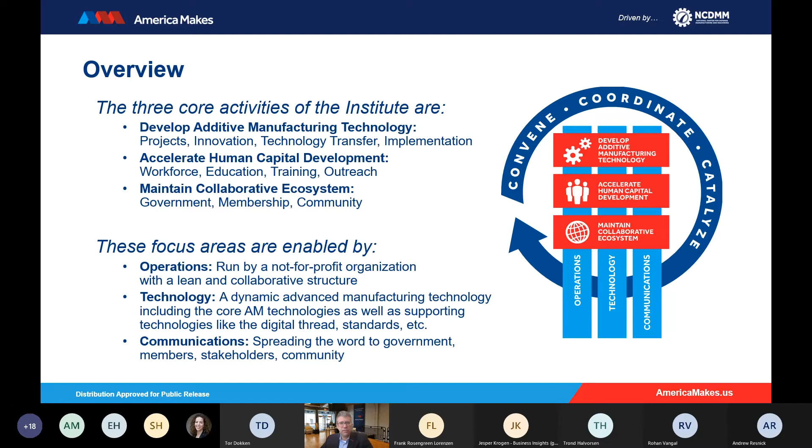But what we saw almost a year ago to the day was, I'm on the East Coast of the United States, and we were delayed a few weeks from what you were seeing in Europe, and right in the beginning of March, we started to see everything become crippled because of not having available supplies, and really we saw the supply chain become immediately crippled.

I remember this like it was yesterday, but we started out having conversations as folks trying to convene and coordinate a technology. We're really focused on making sure we're bringing information to the community and sharing information. And in a time when we weren't sure what was going to happen, most of our conversations were about where can we help support these folks who we know are going to be working remotely, and we knew our worlds were going to change, but we didn't know what that really meant at the time.

That very rapidly transitioned into medical professionals and the system not having the products that they needed, and we saw the additive manufacturing community want to get involved and start asking questions. And as a membership driven organization, we have a couple hundred members that range from very small organizations to very large organizations. We saw everyone from makers to manufacturers getting engaged or trying to get engaged and asking questions.

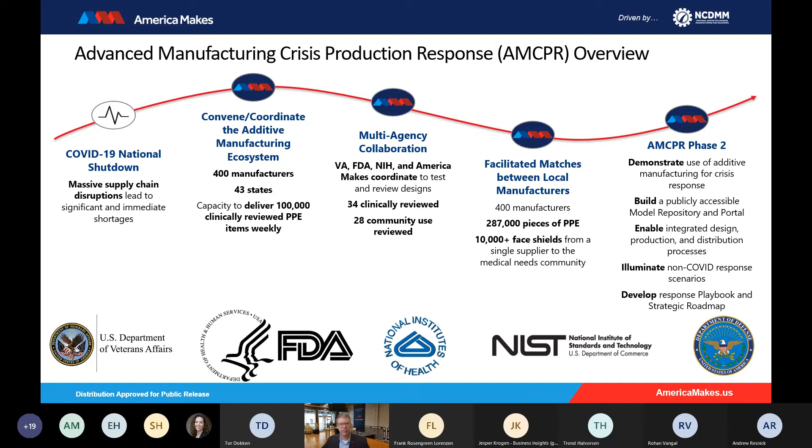What I'm going to talk to you about for the balance of my time is some of the work that we're working on today to try to assure that we are better prepared for the future. So how do we build something that is publicly accessible? One thing that has proven to be very needed early on and through the early phases of the response was people were looking for trusted information. Having our federal agencies come together and using us as a public-private partnership, we were able to reach across industry and academia and even into the small maker community to get the right information to them, because nobody knew what to do. Most folks were not from the medical manufacturing community.

So, this is a graph to demonstrate what we saw happening in the early months. There was a rapid response. We worked really hard on bringing people together, much like we saw all over the globe. Many people wanted to help, but we needed to make sure we were working on the right thing. What we're focused on moving forward is really about scaling capability and then exercising that capability. From the earliest months, we've been challenging what it is that we as a country and really as a globe need to have in place so that people can get access to the information that they need when they need it in a distributed manner.

One thing I think we're all very proud of is how additive manufacturing has really demonstrated the distributed manufacturing model. We've talked about it for years, that additive is an enabler to that working. We have seen it happen time and time again over the past year, where it has stepped up, and that's ranged from early on face shields and different adapters to components for other medical devices to a variety of other different implementations.

We're now challenging the community at large, I would say, and our own governments, of what do we need to have in place so that we're better prepared for the future. The only thing we are certain of is there will be more crises. Whatever they might be, there will be more. And we need to make sure that we have systems in place so that we're able to respond much more effectively than we were able to in this most recent and current pandemic.

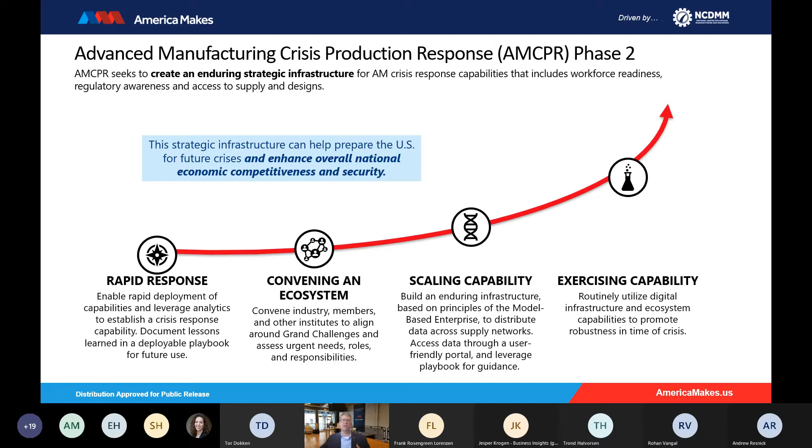So what that's led to for us is the development of this program called AMCPR, or the Advanced Manufacturing Crisis Production Response. What it is really about is how do we bring together the community, the ecosystem, those that are able to be involved and make a difference and support either the manufacturing community, the needs community, or the design community. And then how do we make sure we have that information available? Distributed manufacturing only works if people can get access to the information that they need.

So that's led to really a two-pronged approach to what we're doing. One is engaging with the ecosystem and really trying to build out that supply chain. And on the other side is ensuring that we have a system or a tool in place that is able to actually support this in time of need moving forward. The way we've done that and the exchange that we've built, and I won't get too far into this, but there's a variety of different ways that you can engage.

At any point in time, we need different types of organizations, different types of people to be involved to help support a response, whether that's a natural disaster, a health emergency or pandemic, or there is just an issue with the supply chain. Those happen repeatedly. Some of what we're seeing happen within the chip space today, no matter where you live or where you're dialing in from right now, every country has realized dependency on others, although it is absolutely needed, and a lot more macroeconomics come into play there. At a fundamental level, we all want to be able to take care of ourselves. So we need to understand what we need to have in place in order to do that.

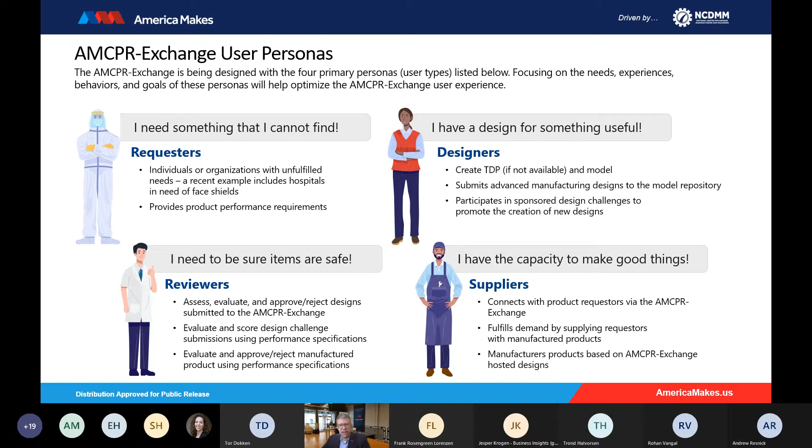Another major area where we saw an opportunity was around education, and really it was more framed as workforce development. So I had multiple organizations call me and want to know how to get their workforces re-skilled so that they saw additive as a potential solution or as a potential bridge or opportunity to pivot because their current model wasn't needed. Something happened, whatever supply chain they might be a part of, where they saw significantly diminished demand. That left them wondering, what do I do with my people? And then at the same time, they saw this opportunity where additive was able to make components that were in critical need, but they didn't know how to get their folks trained.

That ultimately led to a program. We're currently still working this. It's really a continuum or a pathway where folks can get engaged and get re-skilled and upskilled in additive manufacturing and associated technologies. And through that, we've built out a series of different opportunities to get engaged, from just simple awareness to make sure people understood what the technology is, why they should be involved with it, then moving across the continuum where we started to create micro learning badges and then micro credentials that all ultimately rolled up into industry recognized credentials, so that we were able to get information out to the community so that they were able to really leverage and get involved in the response.

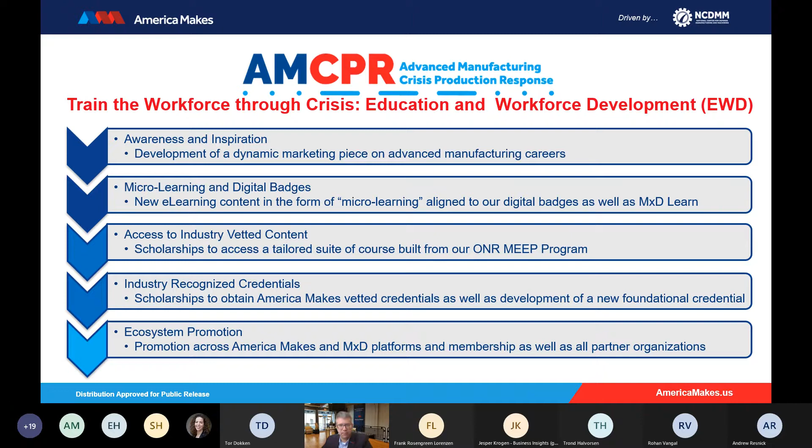And this is an ongoing opportunity. So nothing that we've done, whether in the States or across the globe, is going to go away. Although hopefully, as we make improvements and see the current pandemic diminish over the coming months, we still need a resilient supply chain. We know there are going to be opportunities and needs and issues with supply chain. So what do we do? How do we make sure that we're in a good position, whether it's in the States, Denmark, or anywhere else?

Through this AMCPR program that we're working today, we've created a series of scenarios. So we showed on the diagram where there was a curve, the need to scale and then the need really to test. So what we're doing right now is testing the system. We've created a series of different scenarios. We're testing everything from natural disasters. So if there was an earthquake and we saw the inability to get clean water where it was needed, how does the additive manufacturing community have the potential to make a difference there?

As you can imagine, we're doing some scenarios focused on the current healthcare crisis that we're in. We have some that are focused on national security, where if there is a problem with a system that is down and needed, how do we get the right group of manufacturers involved in that? And that is a pretty comprehensive system where we're looking at everything from different types of complexity, from process to product, regulatory considerations.

Who are the folks within the manufacturing community that can respond? Do they even know there's an opportunity to respond there? Are they connected? So if you think of a natural disaster, if we don't have the ability to get them information, can we operate in low bandwidth environments, and can we get information offline to them so that they're able to respond? So we're going through the process right now of evaluating all of this.

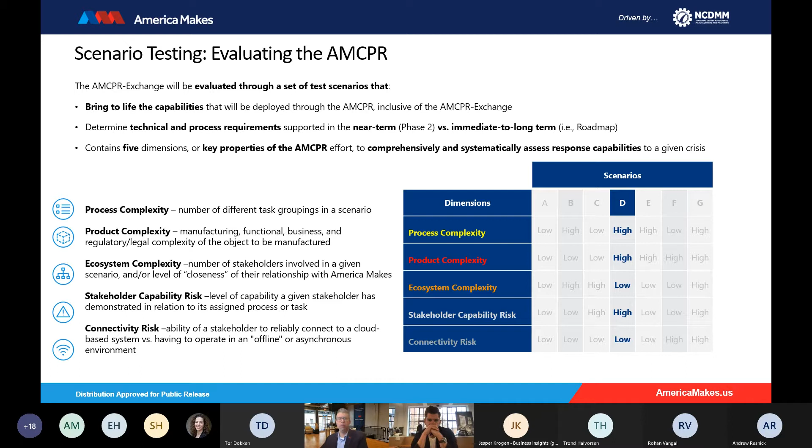So we're developing right now a roadmap for both the system as well as this concept. And the final product that will come out this summer is going to be an impact report, which will, one, capture what was done, why it mattered, and then also at the same time look forward to say, this is what we need to be thinking about next.

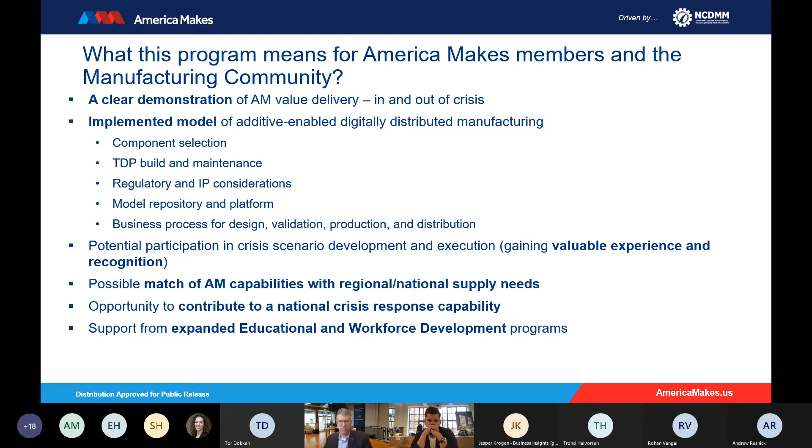So, ultimately what it means to all of us is we know there'll be crises. We know we need resilient supply chains in both times of normalcy and times of crises. We can learn a lot from both of these scenarios, and we need to put systems in place, and then we need to test them so that we're able to take advantage of them when we actually need them.

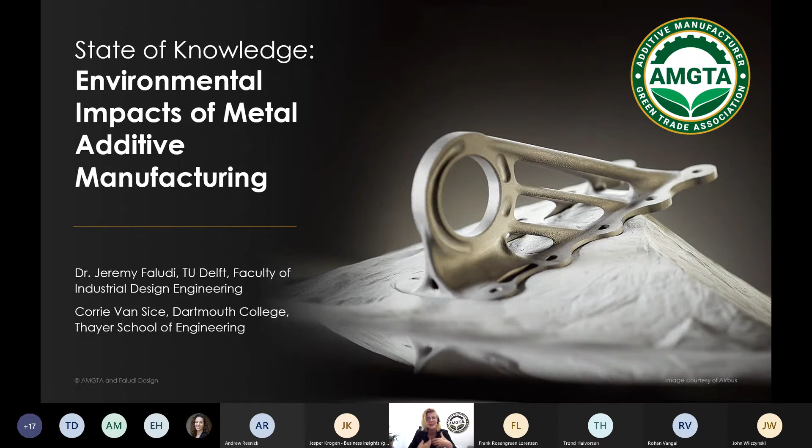This presentation is going to highlight the scarcity of research and motivates us as an organization to start developing good research that examines these improvements. Part design and end-use utility notwithstanding, Dr. Faludi was able to pull together basic facts regarding AM as a manufacturing process versus conventional manufacturing.

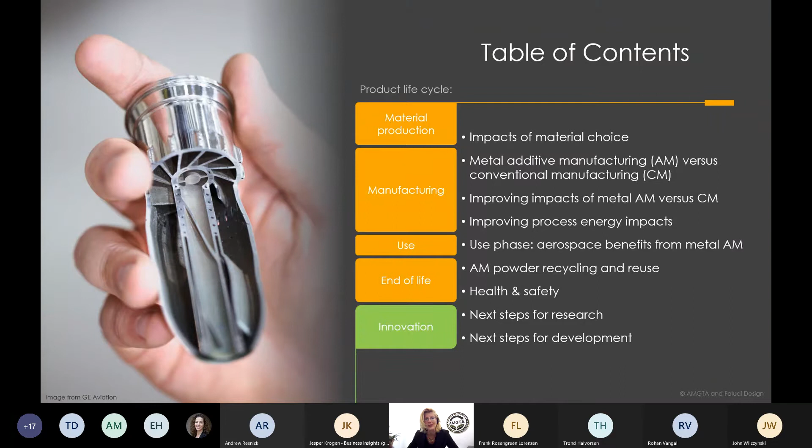In this presentation, we will go through most of the life cycle stages of a part, from raw material extraction to manufacturing, use, and end of life. The only thing we'll skip is transportation because the environmental impacts of transporting parts, whether they're 3D printed or conventionally produced, is usually insignificant, a rounding error compared to the impacts of other life cycle stages. Finally, at the end, I'll leave you with next steps, both to improve our knowledge on how to make AM more sustainable and to apply the lessons we already know to green the industry.

First in the life cycle of any part is mining the ore and processing it into pure metal. The process includes shaping it into a form that's useful for manufacturing like ingots, or in the case of AM, ultrafine powder. As you can see from the graph, different materials have very different embodied impacts. Aluminum has about double the carbon footprint of stainless steel, while titanium is over 7 times. Processing these refined materials into powder doesn't add that much impact. Please note that these are virgin metals. Recycled aluminum actually has 95% less embodied impacts per kilogram, so it's even better than recycled steel. This is definitely an area for future study.

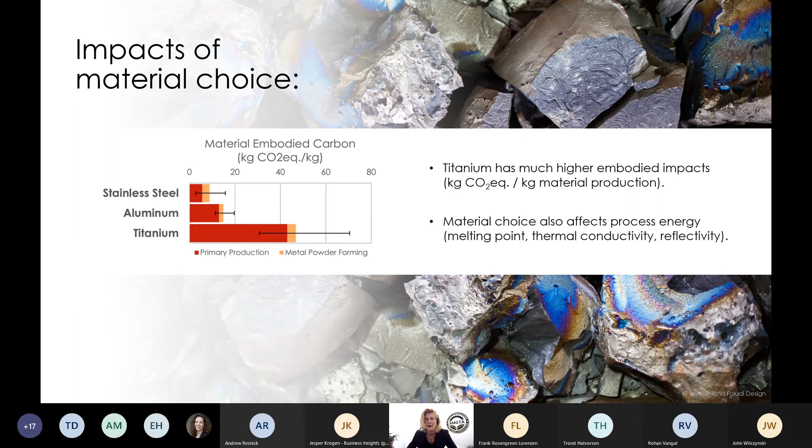A material's impacts don't end with initial processing. They also influence manufacturing impacts. The higher the metal's melting point, the more energy you'll need to fuse it during printing, and higher thermal conductivity means the heat you apply to fuse it will be dissipated more, thus reducing efficiency. For laser-based processes, the reflectivity also matters. More reflection means less of the laser's energy heats the material to fuse it. This makes aluminum processing energy higher impact than you might expect.

There's a whole world of data on the environmental impacts of traditional manufacturing. Most of it quantifies the impacts per kilogram of material processed. You can find carbon footprint data, but also lots of other metrics from acidification and ozone layer depletion to water use and land use. Good life cycle assessments measure up to 18 environmental impact categories, but here we're just looking at carbon footprints, because LCAs of 3D printing have been quite limited and most of them only measure the CO2. We can look up the carbon footprint per kilogram of any conventional manufacturing process in lots of databases.

We used one of the best, Granta's CES EduPack, but it has no data on AM because there aren't enough LCAs out there. So to compare the impacts of AM to conventional manufacturing, we had to compare LCAs of AM published in academic journal articles to the Granta database. If you compare the processing energy impacts of AM to casting, extrusion, rolling, forging, or wire drawing, anything except machining, you'll see that AM has between 5 to 700 times the impact per kilogram. But 5 times is very different than 700 times. Why such a wide range?

Partly because conventional manufacturing methods can have very different impacts from each other, and partly because very few studies have been done on metals AM carbon footprint, much less directly comparing it to other manufacturing methods, so we don't know how repeatable these numbers are. More studies need to be done. But you might be reassured to hear that if you measure not just processing energy impacts, but also the embodied impacts of the materials themselves, which we saw in the previous slide, the ratios go way down. Now 3D printing steel is only 4 to 8 times the impact per kilogram of the other processes, and titanium is only 1.4 to 1.7 times.

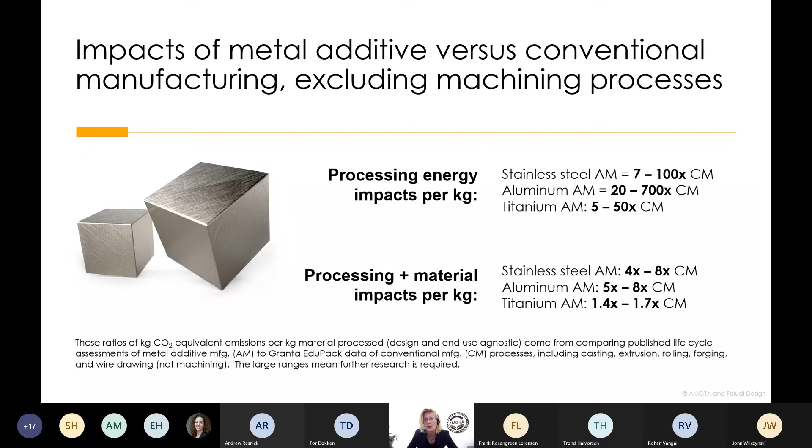Fear not, however, it is important to note that these numbers are all design agnostic, meaning that operational improvements in design, such as weight savings or a combination of traditional manufacturing steps, are excluded. For example, look at these cubes. Does anyone think that additive manufacturing would be the most sustainable way to manufacture a basic cube like this? Of course not. As we will discuss, the true power of AM is in the design and final part geometry, aspects that a basic fabrication comparison such as this ignores. This is a crucial distinction that we will study at length through the use of life cycle assessments, where intricately designed and optimized components manufactured additively will be compared to their traditionally manufactured counterparts.

Now, hopefully you're wondering why in the last slide I didn't include machining. Well, here I'll explain why.

The reason is because machining impacts are different than all other types of manufacturing methods, because you actually start with a cube or a block of metal and you cut away some of it. The impacts increase per kilogram of material you remove, not per kilogram of material you add. This means that comparing environmental impacts per kilogram of material is a fundamentally bad metric. In the LCA world, it's called a bad functional unit.

A better functional unit would be a specific part you manufacture both by machining and by 3D printing. That provides a fair comparison for the actual end goal, whatever the function the part has. There are very few studies out there that do this, but here is one by Priarone and others directly comparing EBM of titanium to machining it. And they compare them not just for one reference part, but for 3 reference parts. Part 1 on the bottom here, ID1, part 2, ID2, part 3, ID3.

You see the CO2 emissions on the left. Machining is noted by the crossbars going diagonally to the right, and AM, EBM, is noted by the crossbars on the second bar for each part. They compare 3 variations on the reference part, from totally solid in the first case to partly hollow in the second case to very thin-walled hollow in the third case. The graph compares the impacts for all 3 parts.

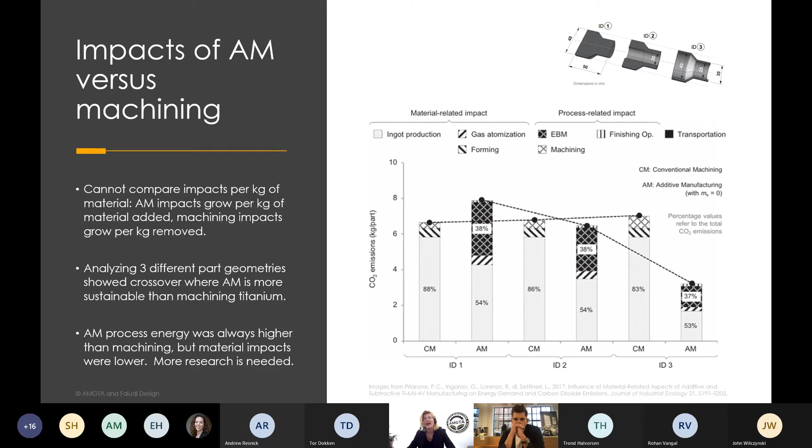Also notice that in this graph, the impacts of the EBM process were always bigger than the impacts of the machining process. But they don't need to be better if you make the whole system better, because the thin-walled part used so much less raw material to 3D print versus to start with the block and cut away most of it. And because titanium is a really high carbon footprint material, that made the whole system better despite the higher processing costs.

And to illustrate how AM can sometimes be a greener technology than conventional manufacturing, even if it has a higher impact per kilogram of material processed, the key point here is to find places where design for AM can, first, reduce the material embodied impacts. This is usually by reducing the part mass, but you could also do it by finding a lower impact material that is just as strong, but doesn't work in conventional manufacturing. Even if the lower impact material isn't as strong, you could compensate with clever geometry.

Second, consolidate parts so that you can avoid a bunch of conventional manufacturing operations. This photo is of a GE engine that, when conventionally manufactured, required 855 parts, but their design for AM cut it down to just 12 parts. So even if the AM process energy is 10 times the conventional process, if you have to do only 2% of the number of process steps, you might end up saving 80% in processing energy.

Now, GE didn't measure the energy impacts here, so we don't know the numbers, but it would be interesting if someone would find out. And the third thing you can do is design for AM such that you improve the part's performance during its use phase, or otherwise help the bigger picture beyond manufacturing.

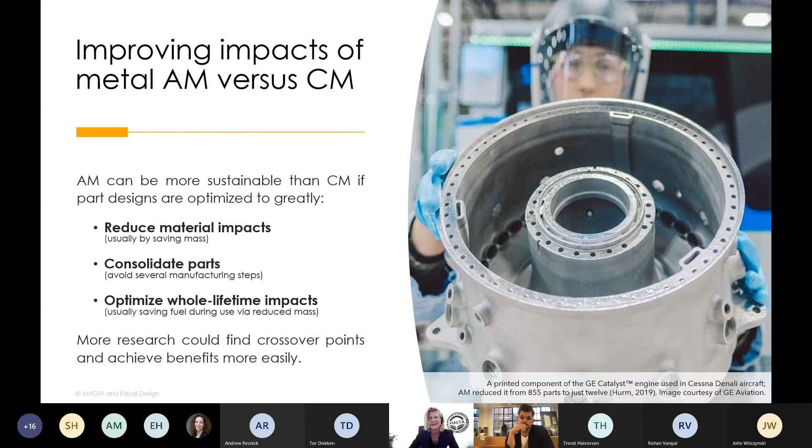For example, lightweighting parts saves fuel in aircraft, or using metalloceramic alloys that enable more efficient engines, but can't be machined. Again, further research should test the limits of these improvements, both to see what's possible in the best case scenario and to avoid greenwashing by seeing where we might assume there are benefits, but in reality, there aren't any.

To improve processing energy impacts, either as the operator of an existing printer or the designer of new kinds of printers, there are several things you can do. Here are some important ones. Utilization makes a very large difference. The same part printed on the same printer can have over 10 times, sometimes 20 times the environmental impact per part just from printer utilization.

So work to enable the sharing of printers to fill the print bed, printing many parts at once, and to minimize idle time between prints. Idle time can be surprisingly important because some systems use almost as much electricity when they're just sitting there as they do when they're printing.

First, choose materials that reduce processing energy. This is different than choosing materials with low embodied impacts, but you can do them both at the same time. This generally means metals with a low melting point, low reflectance, and low thermal conductivity. These can help by several percent. But if you want to make radical innovations, consider how you might eliminate the need to melt things entirely. That could radically reduce energy demand.

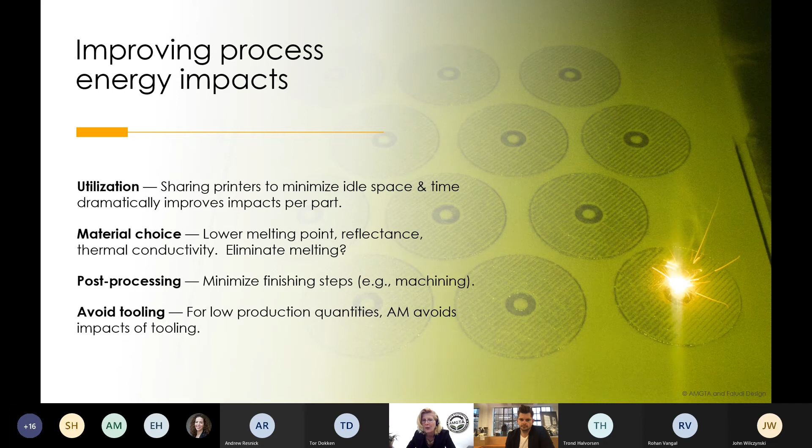Post-processing is not usually a big impact, but minimizing it can help minimize overall impacts. Finally, one of the benefits of AM versus conventional manufacturing is avoiding tooling for small numbers of parts produced. Luckily, the environmental impacts follow the same trend as the economics here. The crossover point where AM becomes lower cost than conventional manufacturing won't be exactly the same as the crossover points where environmental impacts become better, but you could calculate them the same way.

So in the interest of time, I'm going to skip a few of these, but all of this is covered in great detail in the paper. I just want to focus on next steps for research, and then we'll take some questions. This leads us to next steps. What does the world need for green metal 3D printing? First, we need a lot more research, as you've heard me mention many times, because there isn't really that much research out there on LCAs in 3D printing.

More life cycle assessments can help us understand where the environmental benefits and problems of metal AM are. And of course, this is true for polymers and other materials. And to avoid greenwashing and find great opportunities, set our priorities to improve and help us benchmark current impacts so we can set the measurable goals of how much we think as an industry we can improve. And what should these LCAs do?

First, we want to measure more printer technologies. Only a handful have been measured so far, and they haven't been well compared to each other, much less to conventional manufacturing. SLM and EBM are okay from the research, but DED and its variants have almost no studies measuring their impacts, much less making comparisons to conventional manufacturing.

And second, more LCAs should consider all life cycle stages of printed parts to understand whether manufacturing impacts are even a priority for most metal AM parts. And lastly, LCAs should have more fair comparisons, not comparing impacts per kilogram of material, but per part produced. These should have varying geometries relevant to their applications.

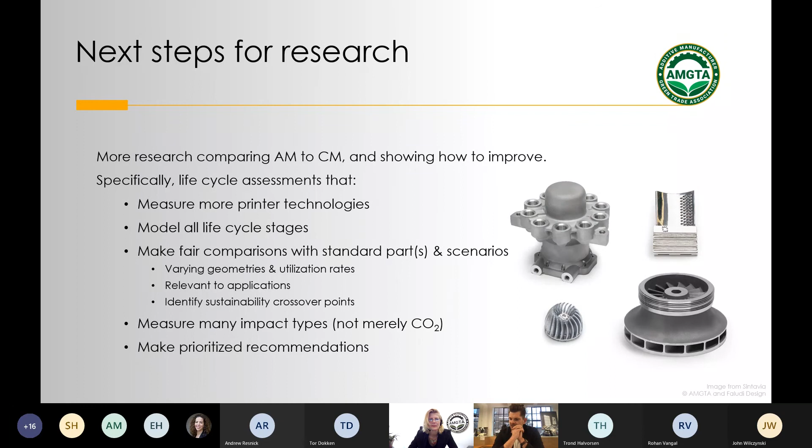Not surprisingly, I really agree with you, Sherry, on your point in looking at the geometry, because I often find myself in kind of heated debate with researchers that would calculate, if I produce 1 ton of polymers with AM and I injection mold 1 ton of polymers, what is the comparison? And I would say I would never do that. I have to use the design freedom inherent within AM to create a whole new product.

And then from that, I can even maybe make that even more energy efficient. And then you compare. So I think that's really a key point that we need to highlight and just need to really take into the future research also within this key area.

And then another point I'd just like to hear your thoughts on is the energy side of things, which is also a critical issue in terms of the printer, right? Because if you print one part, obviously you would use more energy than if you just injection mold it really fast in a really efficient injection molder.